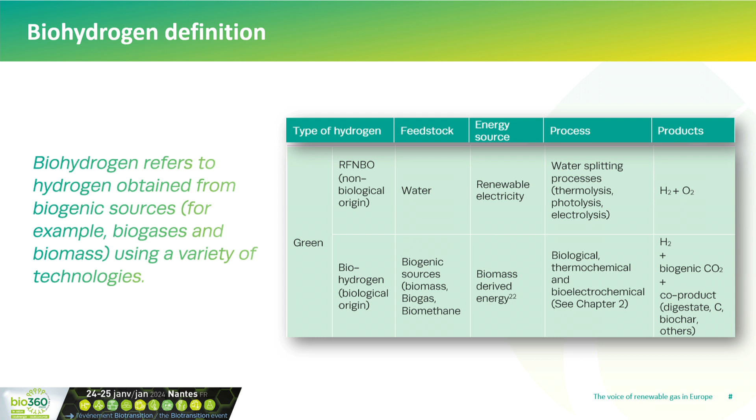Now, why would we produce biohydrogen from biogas? Because biogas and biomethane are already end products that have a lot of end-use applications and are already being widely used today. But I would say that the benefit of producing biohydrogen is that it increases the versatility and flexibility of a biogas plant, because you can diversify the end products that you have. So you can work even more demand driven. So if you have a specific business case where you have a nearby hydrogen demand, you can divide your production of end products more towards what the current markets are today, but also in 5 and 10 years, and what prices are being given for your end products.

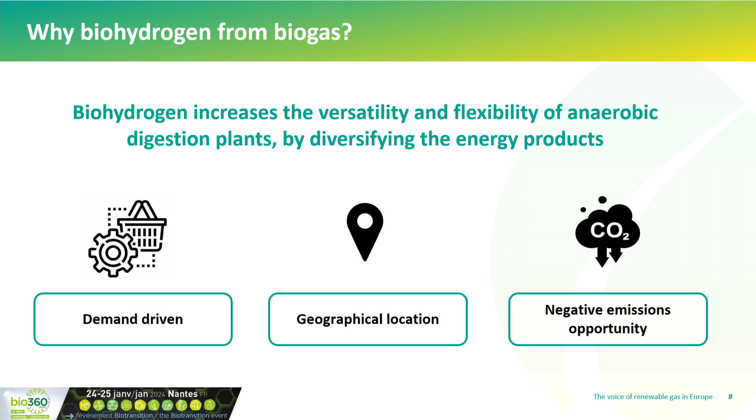Also very important is the geographical location of your biogas plant. If you are in a place where there is hydrogen demand but no hydrogen grid, or it's more expensive to get hydrogen at that location, it can be interesting to produce it directly there with a direct offtake. There's also a negative emission opportunity: when biohydrogen is produced from certain types of organic waste and combined with carbon capture and storage, you can achieve biohydrogen with a negative footprint, which is also interesting for certain sectors to offtake.

Next, biohydrogen production technologies. Biohydrogen goes much broader than just being produced from biogas and biomethane. We have different production routes, which can be biological, thermochemical, and bioelectrochemical.

Looking at the biological routes, we have dark fermentation. This is basically when you cut your anaerobic digestion step right before the end, skipping the step of going from hydrogen and carbon dioxide towards methane, so you avoid that last step and hydrogen is the end product. Then we have photofermentation and biophotolysis, two production pathways based on the photosynthesis process, meaning you need solar irradiation. Photofermentation is anaerobic, while photolysis is an aerobic process.

Then we have the thermochemical processes: gasification, biogas methane steam reforming, and pyrolysis. This means you adjust temperature and pressure to arrive at your end products and steer these processes towards hydrogen—this is, of course, very simplified. We also have bioelectrochemical routes, one example being bioelectrolysis, which is basically similar to usual electrolysis of water to produce hydrogen, but instead of water as feedstock, you use organic waste—for example, water with a certain organic load—which can be used to produce hydrogen as well.

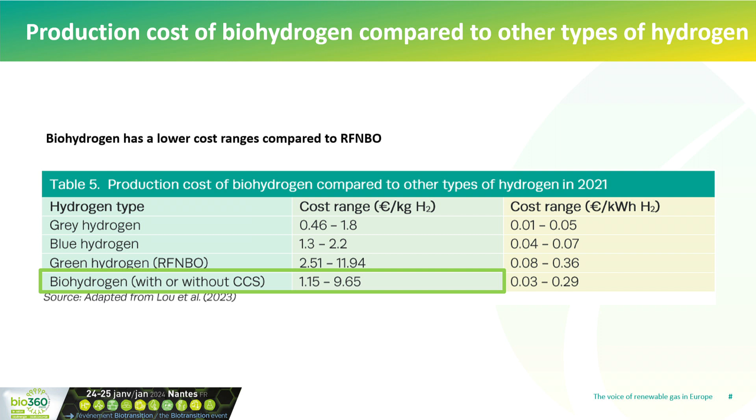Then, production cost of biohydrogen compared to other types of hydrogen. Here too you see quite a big range in production costs of biohydrogen. The range starts approximately at the cost of gray hydrogen, and the upper limit would be around the production cost of RFNBOs.

Then, regulatory barriers and recommendations. What we see at the moment is a lack of market access, basically because biohydrogen is in many regulations not defined, so it's also not considered—and this really poses a barrier on market access. As a recommendation, we would have to recognize biohydrogen as hydrogen also of renewable origin in EU legislation, and have a definition ready to really recognize this type of hydrogen.

There is also a lack of price signals through taxation. The recommendation would be to revise the minimum taxation levels of the Energy Taxation Directive, the Gas Directive, and the Gas Regulation accordingly. Thirdly, there are insufficient and discriminatory consumption targets: when we look at the targets in the Renewable Energy Directive, they only look at RFNBOs for hydrogen. So the recommendation is to expand the targets for RFNBOs in the Renewable Energy Directive to include all types of renewable hydrogen.

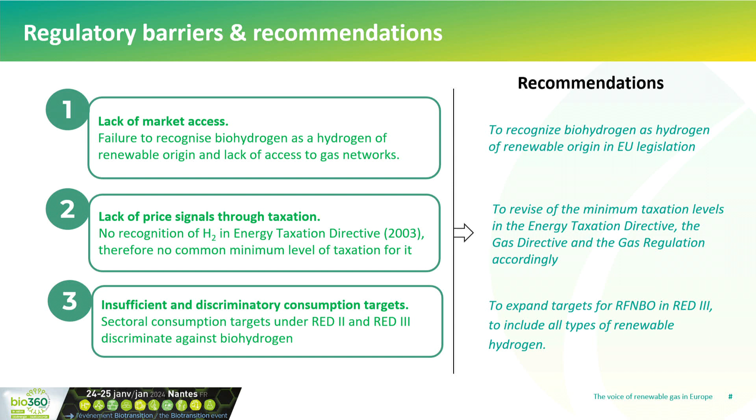We have published a full paper on this topic, available on our website, which goes into more depth than what I've talked about here. Thank you very much, Mieke.

Thank you. If you have some question, I know the first one is always the hardest. To Mieke, in English or in French. Otherwise, I have some questions, so maybe I will start.

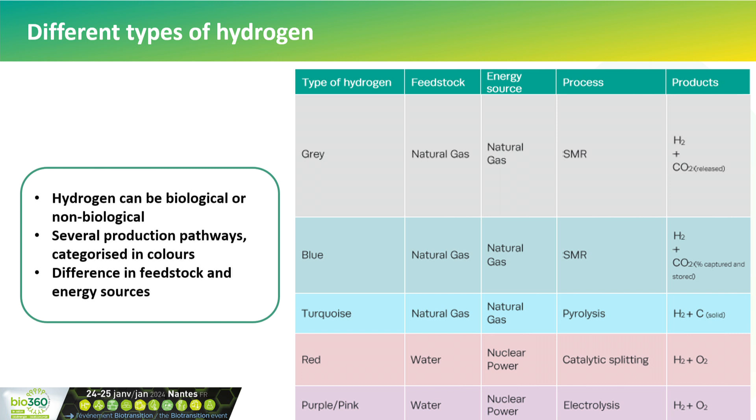If we can go on the slides with the mapping of biohydrogen production technologies - can you map the TRL of the different technologies shown here? I think we have different degrees of maturity across these technologies. Maybe explain which ones are the most mature and which ones are still emerging, for the moment.

Actually, we have this table in our white paper, but I did not include it on the slides. I would say gasification and biogas methane steam reforming are the most mature and already at commercial phase, because biogas methane steam reforming is the same process used in gray hydrogen production from natural gas. If you use it on biomethane, it's exactly the same. If you do it from biogas, you have a mixture of methane and carbon dioxide, so it's a slightly different process, but this is also quite advanced, with ongoing research.

The less advanced, I believe, are photolysis, photofermentation, and microbial electrolysis. But the exact TRL levels are in the paper that we have published.

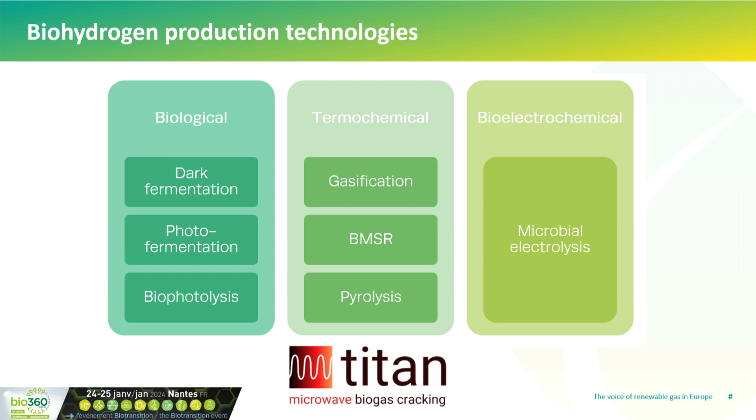Thank you very much. Maybe the room has another question, otherwise, let's go to the next slide with the carbon footprint of technologies.

Yes, it really depends on the type of biomass used to produce it, and also if you do it without carbon capture and storage, you will have a higher carbon footprint. But it's certainly something to consider, that with respect to biohydrogen, your range of carbon footprint is much larger than for other types.

One last question: what is your vision between producing biohydrogen from biogas, and is it not against the fact that we want to inject green gas into the grid? What is your vision on the market for biohydrogen from biogas against direct injection into the gas grid?

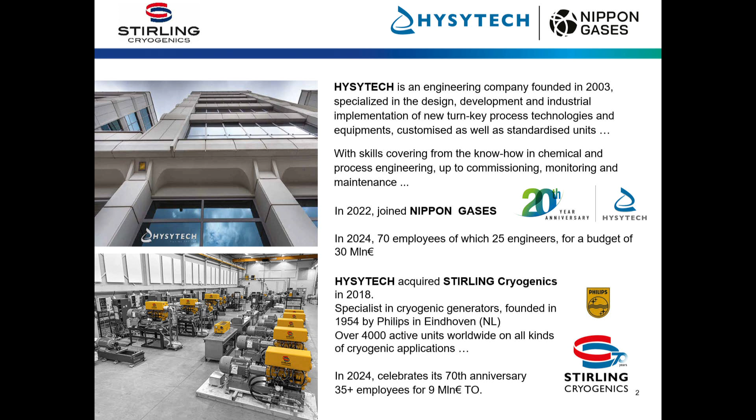Now we are 70 people working at HYSYTECH, and we have a budget of 30 million euros. And in 2022, we were basically linked with Nippon Gases. So Nippon Gases are shareholders of HYSYTECH. And on my next slide, I'm just going to introduce a little bit Nippon Gases, what they do and what we do with them.

Nippon Gases is a technical gas supplier, part of the Japanese holding Mitsubishi Chemicals and Nippon Sanso Holdings. HYSYTECH joined Nippon Gases as a technical supplier for them. So we've been building plants for them, and that's what we do. We supply the technologies, and they add value to the gases for them.

Now, what do we do at HYSYTECH? We do standard units, and like I say, we build plants. So we do biogas upgrading, separation into biomethane. We do liquefaction of biogas, or producing basically LNG. We do CO2 recovery - everything is linked. We liquefy the CO2 as well.

Like I said, we can do customized plants. Of course, in liquefactions, boil off gas recovery, like on boats. All that through the Stirling Cryogenics facility. Any special plant or projects, pilots or prototypes, we can do in engineering and chemical or gas industries.

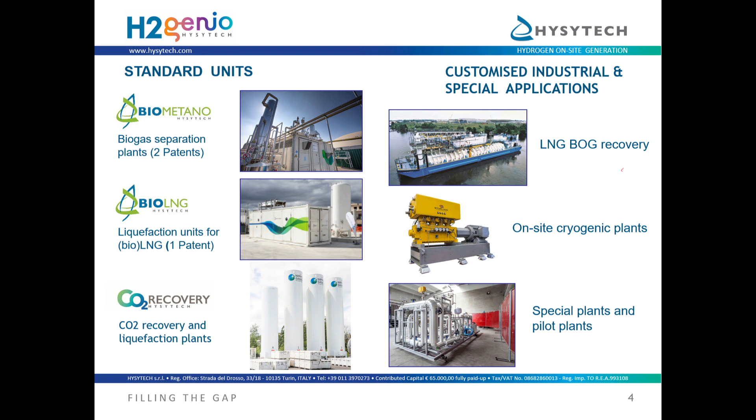Now I'm going to switch to the H2genio. And like you say, for this we're using similar technology. So what we do with H2genio, we produce hydrogen on site of users. And like you said, it's a very important feature to be able to produce it on site of the users, from natural gas, of course, and from biogas or biomethane.

This is based on the SMR process. For those of you who don't know, we recombine CH4 with H2O. First reaction produces CO and H2, and we got a second reaction to produce some CO2 and some H2. That's the basics of the SMR.

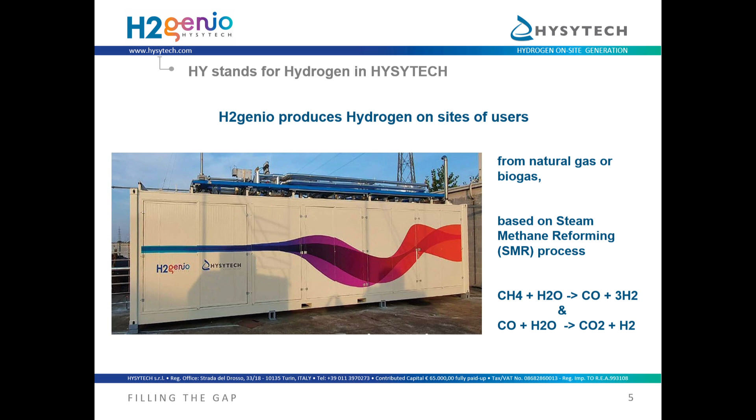I'm going to show just the inside of an SMR reactor. I use a sketch because it's fairly simple, and with a few numbers it shows briefly how it works. We need heat, and the process is occurring around - we say here it's showing 850, but it can also occur at lower temperatures. That's what we do.

So we use a fuel, which can be CH4 or other gases, which I'm going to talk about in a minute. Air, of course, to heat up. And then we've got the SMR chambers, where basically the process is occurring between the CH4 and the steam, with a catalyst within the chamber, and it produces the syngas. And of course, we got flue gas or exhaust gases. So that's the general way of an SMR process.

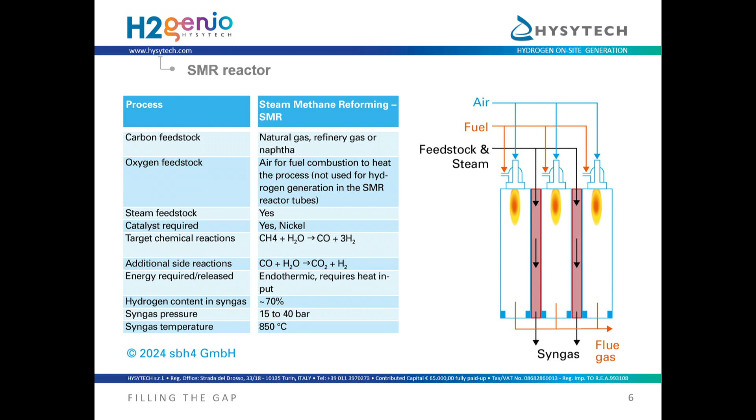How we integrate it in our technology, the H2genio technology, is what we call the fuel processor. I'm not going to show everything what is inside the circle, because it's part of our knowledge, but it's fairly similar. We use a feedstock gas, which is CH4. We use a little bit to start the heating up, to create the heat at the beginning of the cycle of the unit. And the ambient air is used to combine with the CH4 to produce heat.

Of course, there are some pretreatment steps, desulfurization, and other pretreatment systems using carbon filters.

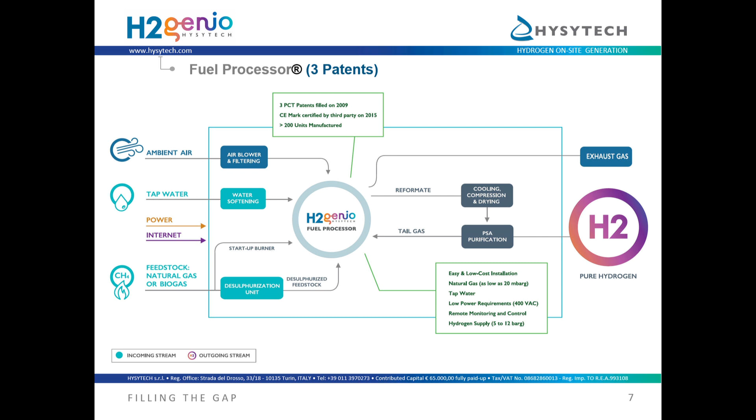Then part of this CH4 is injected in the fuel processor with tap water, which of course needs to be pre-treated as well. It's turned into steam, and this is how we reform the CH4 and get all the gases. Like your systems, we need to cool it down, dry it, and compress it to go through the PSA. We get the H2 on one side, and what we call the tail gases, which include some CO2, some CO, and other gases. We retreat them, and we get the exhaust gases, which can be the gases emitted into the atmosphere, and eventually the CO2 that we can recover as well with our technology. Very similar process to yours.

Now we'll look at our capacities. At Hysytech, we work a lot in containers. Like you saw, we build standard industrial units. So the lowest capacity we can work on is between 20 and 40 normal cubic meters an hour of H2, and that fits in a 20-foot container.

And that's one fuel generator. If we put 3 fuel generators in a 40-foot container, we can produce 120 cubic meters of H2 an hour. The use of containers is fairly convenient because we can actually add containers side by side to increase the capacity.

Within the 40-foot container as well, we have redundancy because we've got 3 fuel generators. So if one is in maintenance or is down, you're still producing your H2. Very important in industry, where they want 24 hours a day production and very linear production. So redundancy is a good advantage.

The hydrogen purity we can get through is grade 4.0 up to 6.0. Again, it depends on what the customer wants, but most of the time this is the requirement we have. Working pressures really depend on whether it's in-feed or out-feed. We will adapt to what the customers really need.

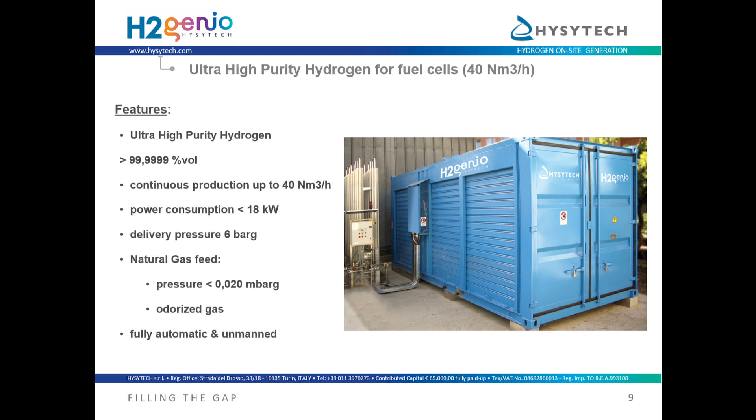So it's pretty low electricity consumption. Then, like I said, other pressures and specs upstream or downstream are fully adaptable. Another application - this is an example of a 120 normal cubic meters capacity container.

Then the bottom photo, you can actually see the 3 fuel processors and SMR generators. In this case, we need lower purity. That was for the steel industry, and they are using the hydrogen in their heating process because of the heating capacity of the hydrogen and the good control on the heat they can get out of it. And again, if you see power consumption, it's 3 times the capacity of the 40 normal cubic meters, but it's only double power consumption. So yes, it is efficient in a way.

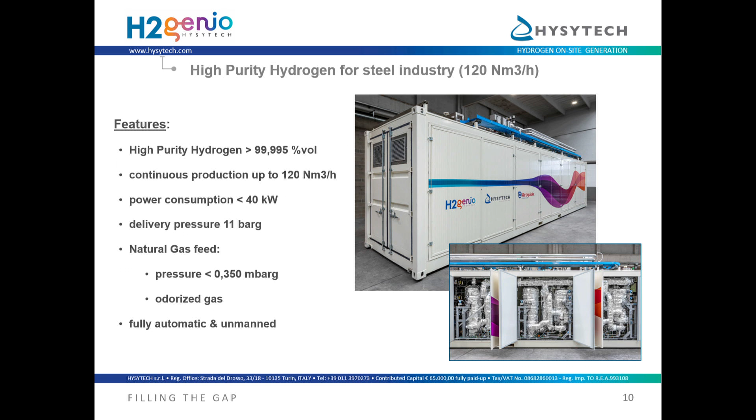High purity hydrogen. Talking about applications, we talk about transport, but this is all the kind of applications we've done so far. From these H2genio units, nowadays we've built more than 200 of them.

Steel industry, chemical industry, R&D are usually for small units, so it's small containers with smaller capacities. Pharma and biotech, I know Philips did use one at some stage. And coming to transport, like you said, it's some new markets for us.

At the moment, we're building some units for the trains in Italy. We are going to supply the hydrogen for the first Italian hydrogen train that is going to be running from next year or early 2026.

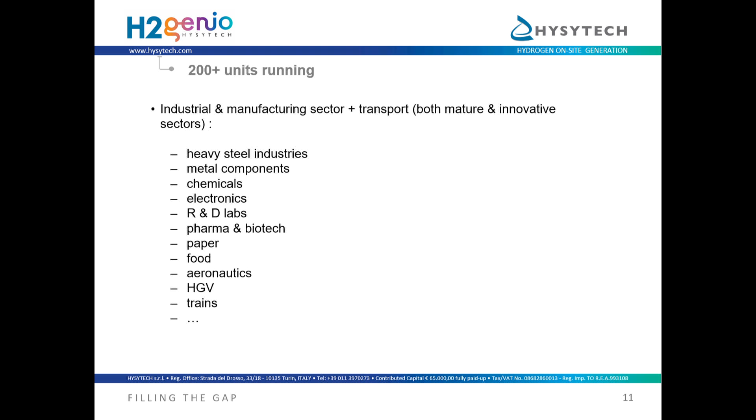Just to summarize, with Hysytech steam methane reforming, we produce high quality hydrogen from natural gas, biogas as well. The advantage of the containerized unit, it's easy to install and set up. It's plug and play, literally.

What the customers want is very linear and continuous production, especially in industry. And we can achieve that, increase capacities with multiple modules for higher capacities, and redundancy in case of maintenance or breakdown.

And to conclude, I would like to remind that the HY stands for hydrogen in Hysytech. It's been like that for 20 years now. Thank you.

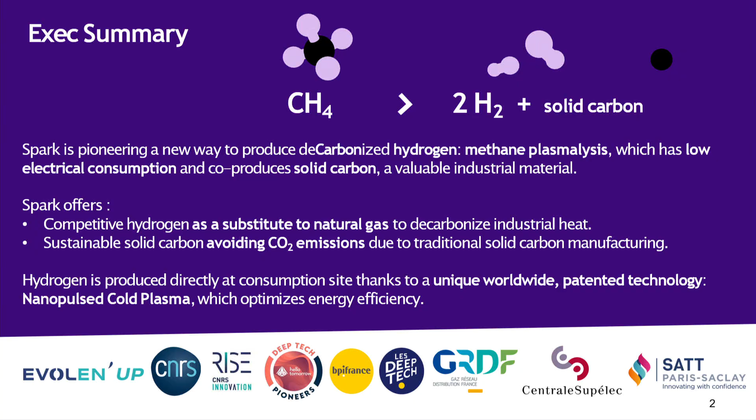Donc l'introduction a déjà été faite. Donc effectivement, on est 3 cofondateurs. Moi-même, j'ai une longue carrière dans l'énergie, l'environnement. Erwan est ingénieur et docteur à Centrale, où il a développé la technologie, ou plus précisément, il l'a appliquée à la production d'hydrogène et de carbone à partir de méthane. Et Alban nous a rejoint il y a à peu près 5 mois. Alban est polytechnicien, il a une longue carrière chez Total, et donc il va s'occuper de la partie opération et donc de développement de la technologie.

On est dans une phase de développement technologique, donc on a besoin de soutien par rapport à ça avec des fonds. On a fait une première levée de fonds l'an dernier, mais aussi une équipe et un écosystème qu'on crée autour de nous. Et donc on s'est entouré de gens qui viennent de l'industrie, de gens qui viennent de l'énergie, qui sont des entrepreneurs, pour nous aider à développer cette technologie. Et donc pour nous, c'est très important d'avoir cet écosystème autour de nous pour pouvoir développer la technologie et aussi positionner la plasmalyse dans l'écosystème.

Donc les 3 gros enjeux auxquels on s'attaque, c'est si on veut décarboner, il faut produire de l'hydrogène qui est décarboné, et donc arrêter les productions par SMR qui sont émetteurs de CO2. Aujourd'hui, quand on parle d'hydrogène vert ou décarboné, on parle beaucoup d'électrolyse de l'eau, mais les consommations d'électricité par l'électrolyse sont énormes. Je vous ai mis le chiffre de 6250 TWh d'énergie à déployer pour arriver à nos objectifs en 2030 au niveau mondial. C'est un quart de la production d'électricité actuelle. Donc on pense qu'il y a un petit sujet là.

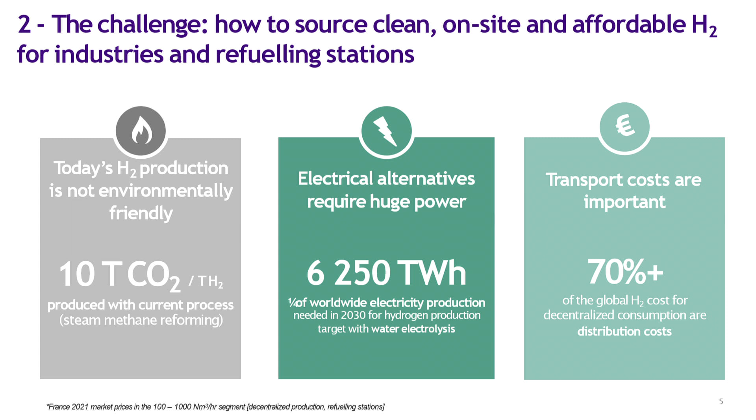Et donc nous, l'objectif, c'est de diviser par 5 le besoin en électricité par rapport à ce qu'on fait par électrolyse. Et dernier point, produire l'hydrogène directement là où on va le consommer, pour éviter effectivement tous les coûts de transport, mais ça a déjà été mentionné.

Donc la technologie, globalement, on a représenté la foudre. C'est une foudre qu'on va maîtriser en boîte, globalement. C'est un arc électrique qu'on va déployer, qui va permettre de faire une soupe d'électrons, qui va permettre de casser les molécules. Donc ça fonctionne sur différentes molécules, en l'occurrence sur le méthane, donc pour le dissocier en hydrogène et en carbone solide. Quand on fait 1 kg d'hydrogène, on fait 3 kg de carbone solide. C'est important derrière dans les équations économiques qu'on a derrière.

Et donc, on est sur un procédé qui est non émissif. Il n'y a pas d'oxygène dans le process, donc pas d'émission de CO2. Pour nous, encore une fois, c'est important de développer des technologies de rupture qui ne produisent plus de CO2. Je pense que c'est vraiment essentiel. Et avec, comme je l'ai mentionné, des consommations électriques qui sont faibles.

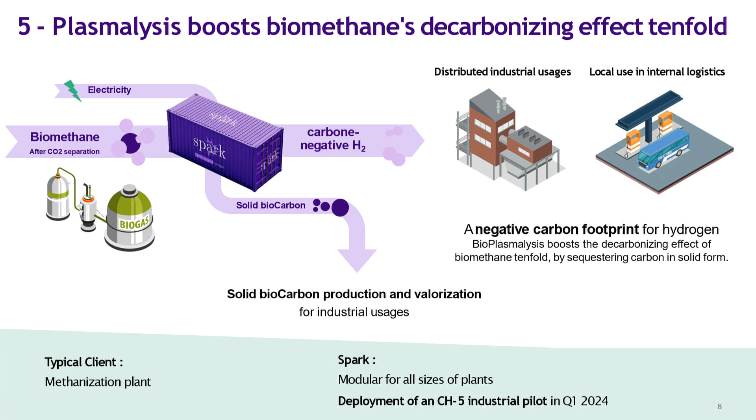Donc le cas ici qu'on déploie sur le biométhane, globalement, l'idée, c'est de démultiplier l'effet de décarbonation qu'on peut avoir avec le biométhane en sortant le carbone et en produisant de l'hydrogène qui a une empreinte effectivement qui est carbone négative. Alors, on n'a pas compté moins 26, nous, je ne sais pas comment on arrive à ça, mais on pourra en discuter. Et pour des usages qui vont être des usages délocalisés, locaux, on a parlé de mobilité lourde, d'usages industriels délocalisés. C'est ce qu'on va cibler avec les installations de biométhane.

Donc le carbone, je l'ai dit dans l'équation, est important. Aujourd'hui, il y a un marché du carbone, du noir de carbone ou équivalent qui existe, qui est à peu près, on va dire, 18 ou 20 millions de tonnes par an, notamment pour l'industrie du pneu, tout ce qui est caoutchouc, des plastiques, etc. Donc on consomme aujourd'hui beaucoup de noir de carbone. Et c'est vital dans l'équation.

Comme je disais tout à l'heure, 1 kg d'hydrogène, c'est 3 kg de carbone. Le prix du carbone, c'est de l'ordre de 1 500 à 2 000 euros la tonne. Et donc, quand on a 3 kg de carbone ramenés à l'économie d'hydrogène, c'est très important. Et donc, ça réduit de façon très importante le coût de l'hydrogène. Et donc, c'est ce qui nous permet notamment de viser des prix de production de l'hydrogène qui permettent de produire de l'énergie de façon compétitive avec le gaz naturel.

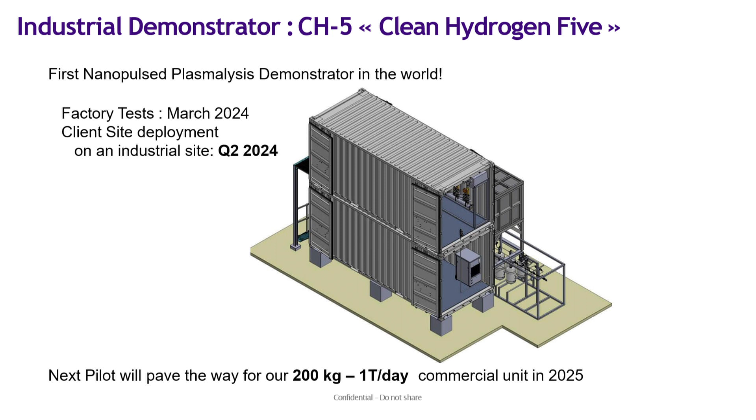Let's switch in English to Natasha. Natasha from Hycamite. Natasha is the VP of hydrogen at Hycamite. Hycamite proposes this methane decomposition technology that focuses on high energy efficient economy processes. Natasha is poised to present key insights into Hycamite's history, technology, and process, shedding light on how the company's products, hydrogen and solid carbon, can effectively decarbonize hard-to-abate sectors. The presentation will also showcase the findings of a comprehensive life cycle assessment conducted for Hycamite. So, Natasha, I leave you the floor.

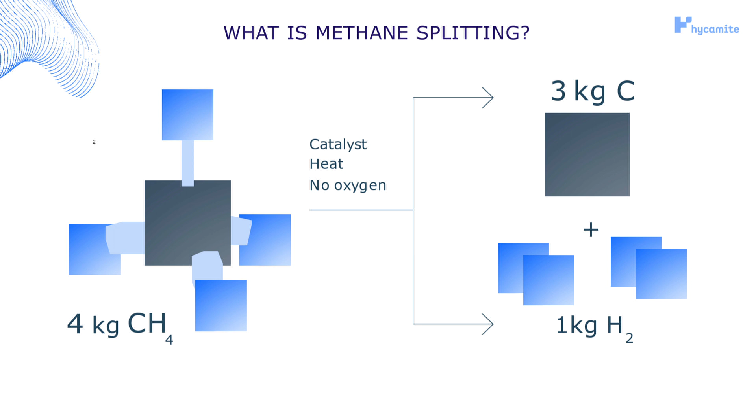Hycamite is a new company, a startup company that is developing old technology with new twists of catalyst and developing the carbon products. We have heard a lot about CO2 emissions and SMR here this morning, and this is the original target and aim for Hycamite as well, to be the decarbonizer of the industry, where the hydrogen has been produced for decades. As we have heard, SMR technology emits 9 kilograms of CO2 into the atmosphere. And the Hycamite process is a process where no emissions are released into the atmosphere. Now we are talking about, of course, biomethane or methane as such.

Hycamite uses methane as feedstock, and the problem maybe is only that the access to biomethane is too low. It is critical. Of course, we are placed in Finland, and we do search for the feedstock around the area where we are placed. I will show you soon the area where we are. It is an industrial area, and of course biomethane can and will be produced, but it is for the moment slightly critical.

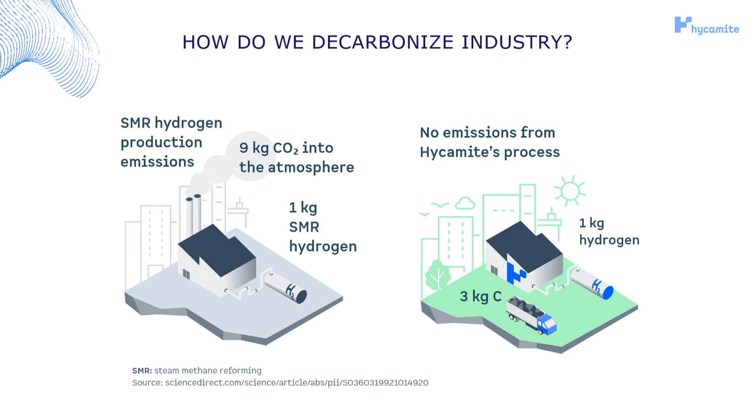Can methane splitting turn hydrogen production into a carbon sink? I think we already have heard and seen about this as well. So this SMR produces very high numbers of CO2 released in the atmosphere. SMR with CCS, carbon capture and storage, also relatively high numbers.

Again, depending on the electricity produced locally, will affect the amount of CO2, as we heard here earlier as well. So this is also something that we all need to consider. The national grids are varying very much from each other with the CO2 emissions.

Especially, of course, we have been making calculations with the Finnish grid mix, and even that, though it is relatively pure, we have very much of renewable projects going on, especially in the neighborhood where we are located, and still we see that it is critical.

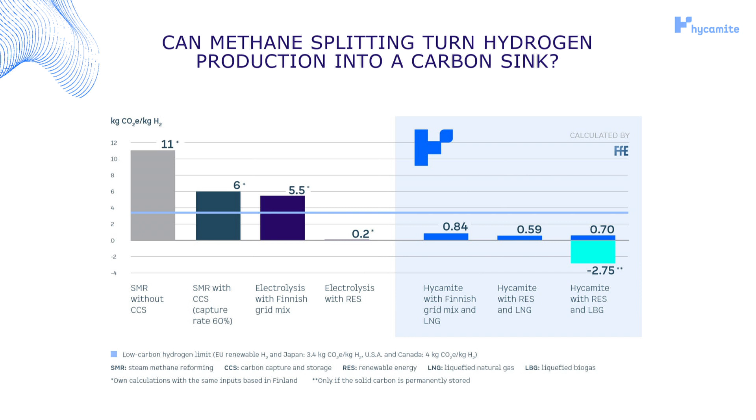Here we have a comparison where we have made a calculation about this electricity carbon footprint or carbon intensity. Here we can see that definitely, no doubt about it, producing hydrogen with electrolysis when there is access to renewable energy is the most profitable and probably at least the most clean way of producing hydrogen.

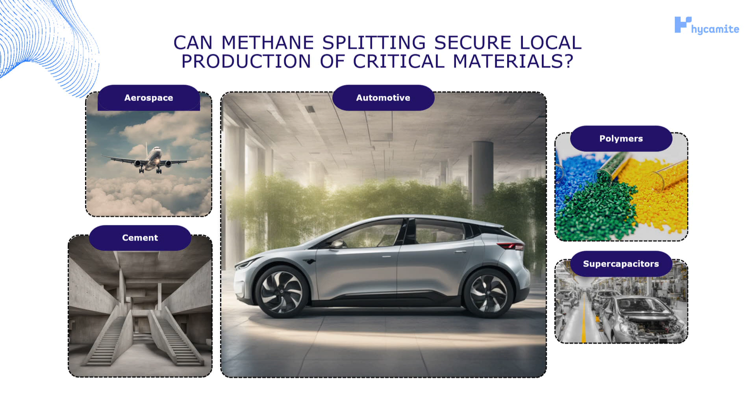This technology is based on 20 years of research and development by Oulu University and a group of researchers that are placed in Kokkola, where we are.

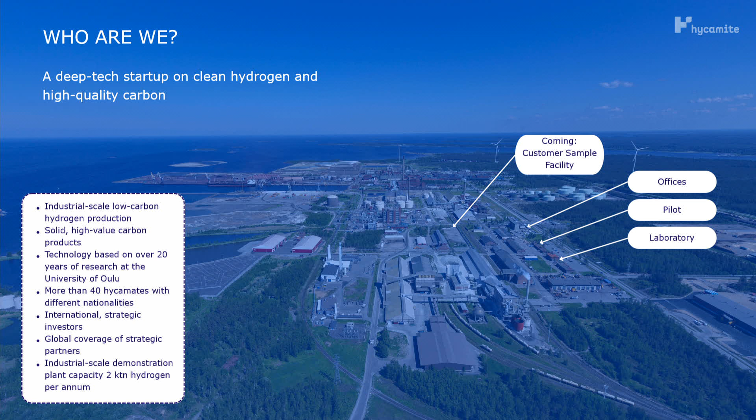What we are building are these industrial scale reactors in Kokkola, which are 2 kilotons of hydrogen and 6 kilotons of carbon. This facility is called Customer Sample Facility. Like I said before, we are using this facility for research and development of the carbon products for different applications that we are making together with our partners, customers, end users. This is not possible alone.

And this is how it is going to look like. With this facility, we are removing 18 kilotons of CO2 from the atmosphere once we are in full capacity, which will take probably half a year up to 1 year, running 24/7, which we are aiming to.

And in that facility, we are going to have 3 different reactors, 2 for these industrial needs and 1 for marine application, which we are developing together with a Finnish company called Wärtsilä.